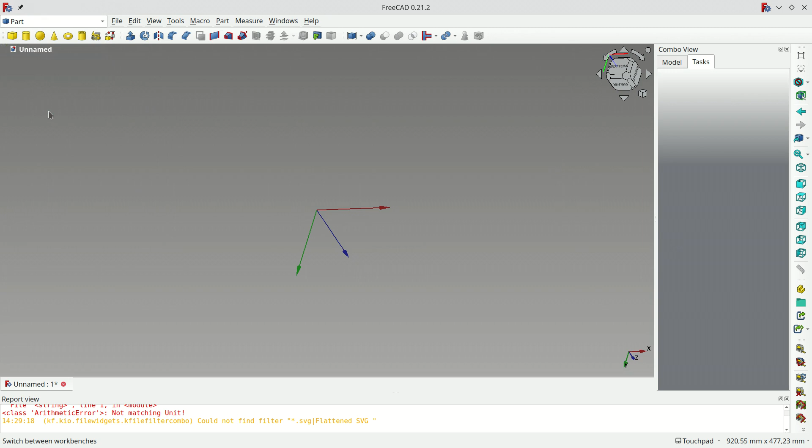So locate this list somewhere and find Part. Use this icon to create a cone, or Part Primitives Cone. Click it and then find this list with model on it. It should be somewhere on the left in the bottom.

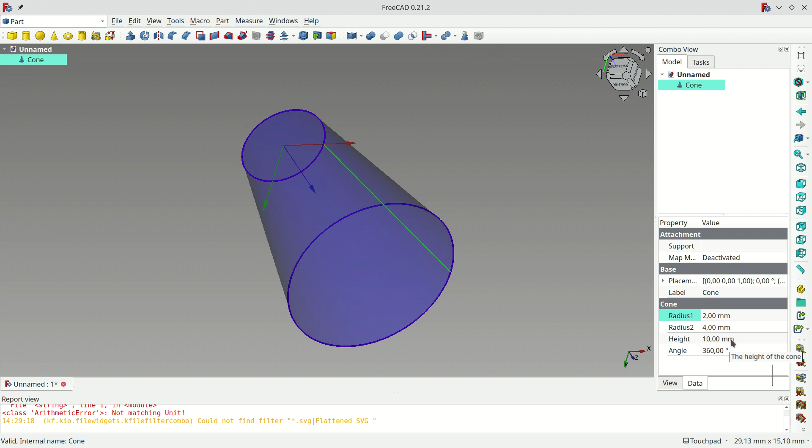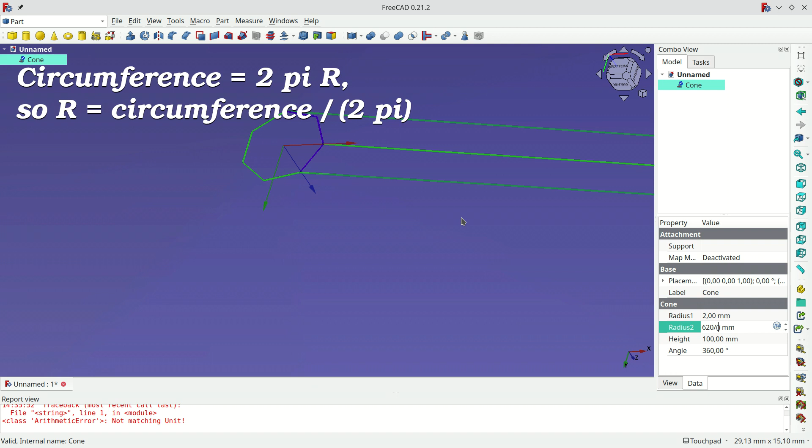We are after these two radii, one of them and this height. One of them is our finished collar height in millimeters, and this one is the neckline. We measured it to be 62 centimeters, and then we want to find a radius here, so I divide it by 2 multiplied by pi.

Calculate it. And if we want to save our formula, we can do it here, and it's a bit more verbose. This way you'll have this actual formula saved, so if you want to modify your measurements, you can do it here without retyping.

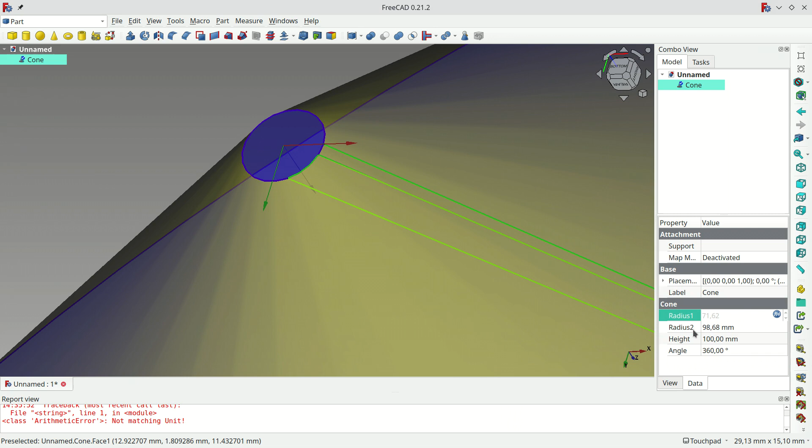If we are smart here, we can add both seam allowance and hem allowance right into this calculation, so we'll get a cylinder that already comes with more height for the seam allowances. But then, if you want hem allowance for the fastener, we'll have to add this into our initial circumference to have hem allowances already in. This way we won't need to do anything in Inkscape at all.

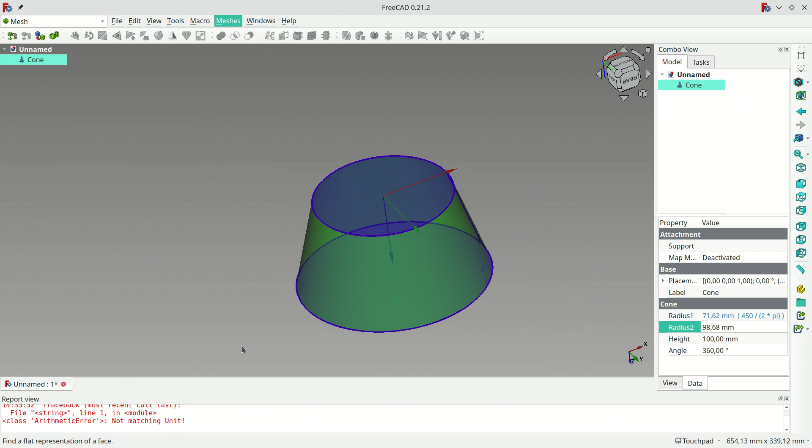Then we switch to Meshes, click it, Unwrap Face. You could click this one, but we need this one long face, so click it and Unwrap Face, and then wait.

Okay, this is the part that we actually want. We can remove the cone, and with our shape we'll go to File, Export. Yes, select it first. File, Export, and name it somehow.

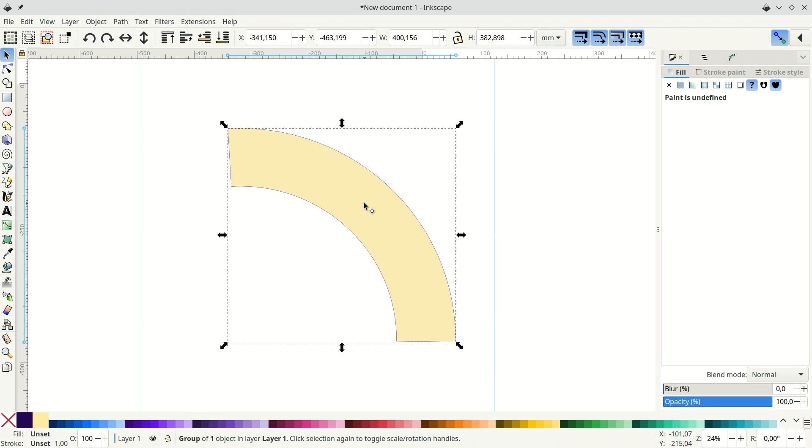Inkscape asks me some questions and I can safely ignore it. And this is our collar, and we actually want to turn it right side up, so it will be along the grain line. So for now I'll turn it some sort of right way, maybe it's even right.

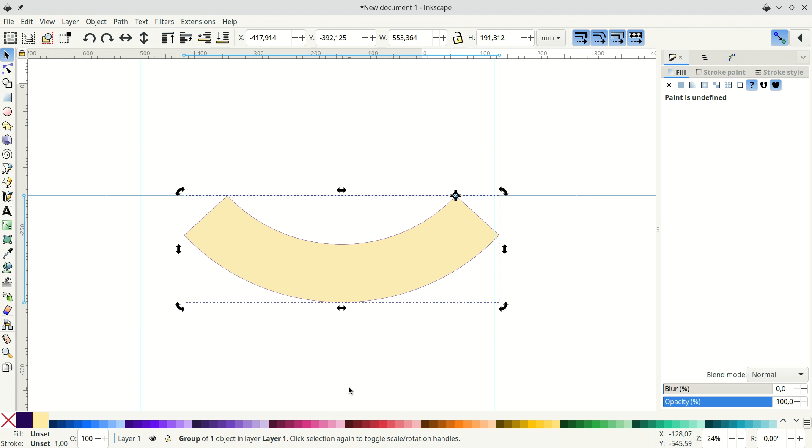We pull a guide, so one of the corners, and then we'll move the rotation center to that corner, and when we pull the opposite corner, it will snap automatically, and now it's with the grain line going upwards, just like we wanted.